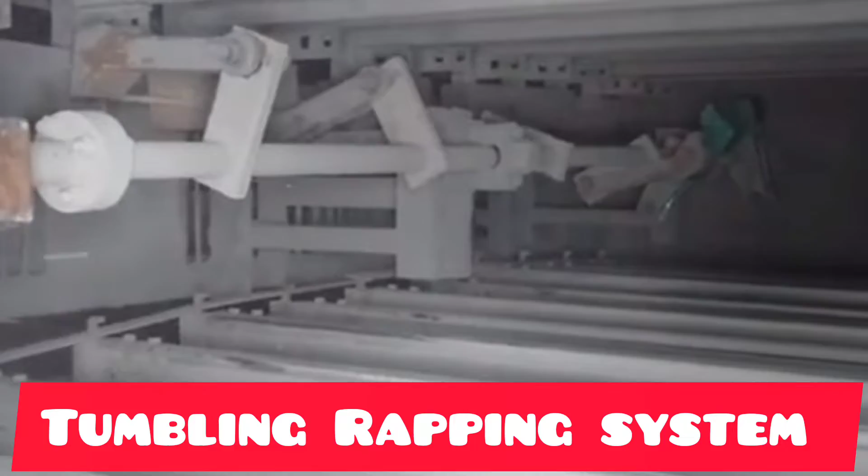Today, we are going to understand the type of rapping mechanism in the electrostatic precipitator, mainly the tumbling rapping system and MIGI rapping system, or magnetic impulse gravity impact rapping system. Before that, let's understand the purpose of the ESP. An electrostatic precipitator is a dust collecting device that removes particles from a gas stream using electrical energy to charge particles. A high voltage system provides power to the discharge electrode to generate an electrical field.

Point 1: Type of rapping system in ESP. Point 2: Purpose of the rapping system in the ESP. Point 3: Application of rapper system in ESP. Point 4: How the tumbling rapping system works. Point 5: Main components of MIGI rapping system. Point 6: How the MIGI rapping system works. Point 7: How to improve the performance of the rapping system. Point 8: Tumbling and MIGI rapping system photos and videos.

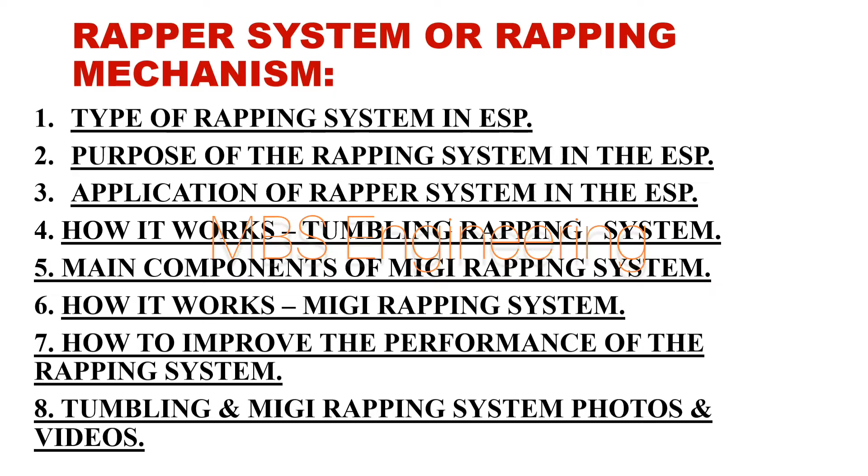Today, we are going to understand the type of rapping mechanism in the electrostatic precipitator, mainly the tumbling rapping system and MIGI rapping system, or magnetic impulse gravity impact rapping system.

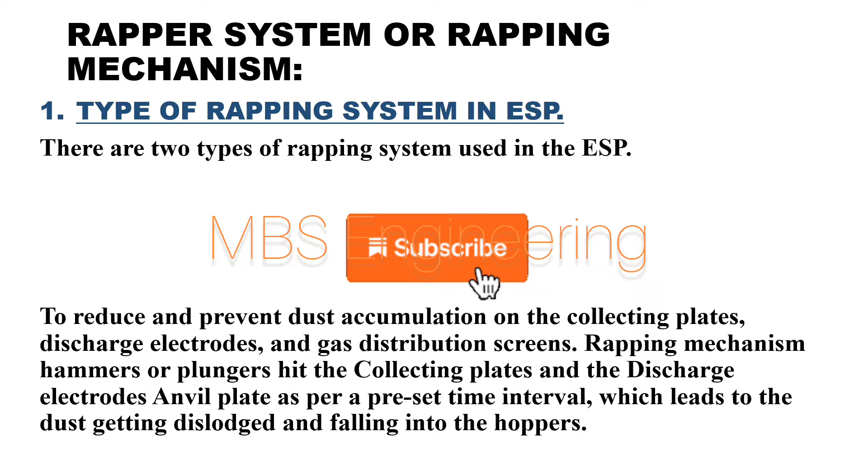Type of rapping system in ESP: there are two types used in the ESP. Point A: Tumbling rapping system. Point B: MIGI rapper system, or magnetic impulse gravity impact rapper system.

Point 2: Purpose of the rapping system in the ESP. To reduce and prevent dust accumulation on the collecting plates, discharge electrodes, and gas distribution screens. The rapping mechanism's hammers or plungers hit the collecting plates and the discharge electrodes' anvil plate at preset time intervals, which dislodges the dust and causes it to fall into the hoppers.

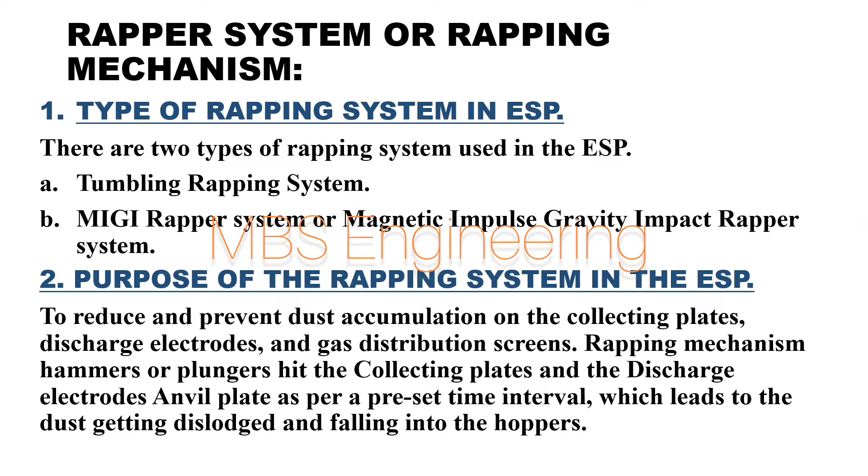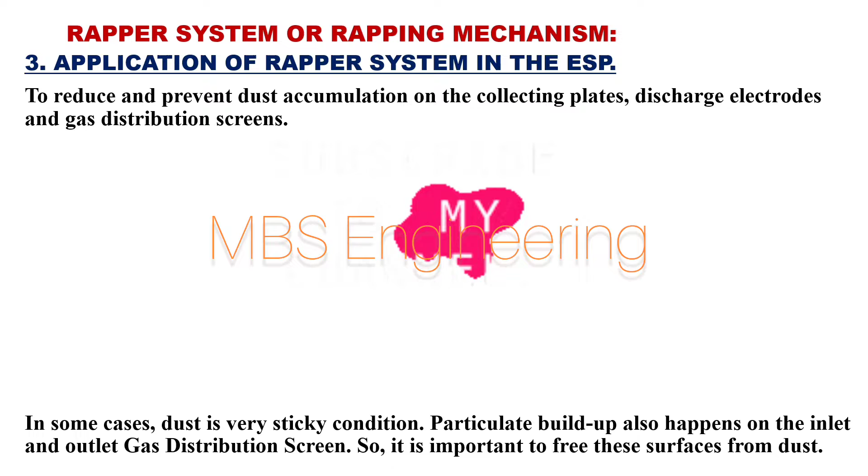Today, we are going to understand the type of rapping mechanism in the electrostatic precipitator, mainly the tumbling rapping system and MIGI rapping system. Point 3: Application of rapper system in the ESP. To reduce and prevent dust accumulation on the collecting plates, discharge electrodes, and gas distribution screens.

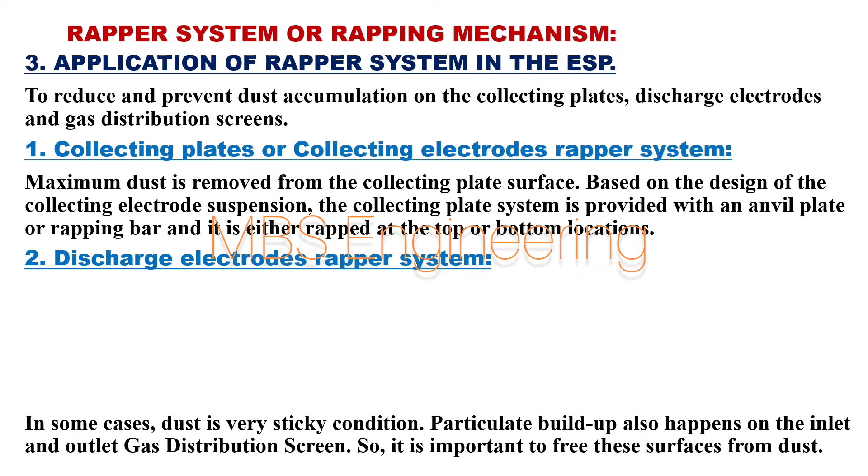Point 1: Collecting plates or collecting electrodes rapper system. Maximum dust is removed from the collecting plate surface. Based on the design of the collecting electrode suspension, the collecting plate system is provided with an anvil plate and a rapping bar, and is rapped either at the top or bottom locations.

Point 2: Discharge electrodes rapper system. The surface of the discharge electrodes is kept free from dust to the extent possible. Based on the design of the discharge electrode suspension, the system is provided with an anvil plate and a rapping bar, and is rapped either at the top or middle locations.

Point 3: Gas distribution screen rapper system. In some cases, dust is in a very sticky condition, and particulate buildup also happens on the inlet and outlet gas distribution screens. So it is important to free these surfaces from dust.

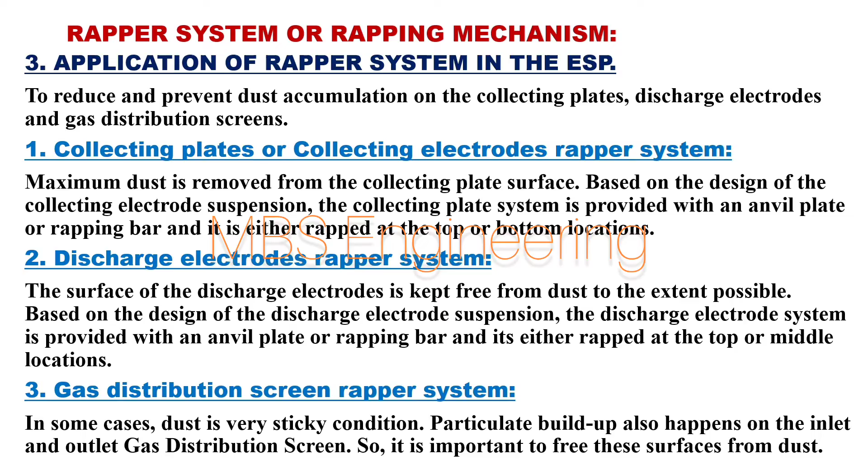Next, we are going to understand the tumbling rapper system, or tumbling rapping mechanism, in the electrostatic precipitator. Point 4: Understanding how the tumbling rapping system works.

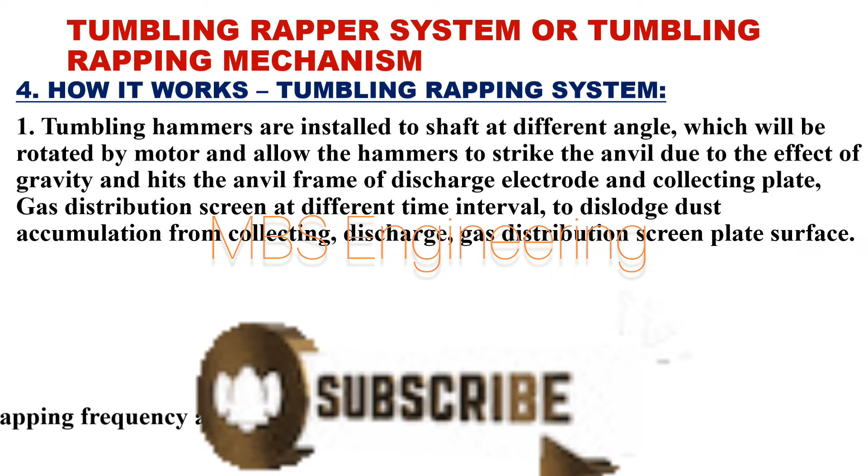Point 1: Tumbling hammers are installed on a shaft at different angles, which is rotated by a motor, allowing the hammers to strike the anvil due to the effect of gravity, hitting the anvil frame of the discharge electrode, collecting plate, and gas distribution screen at different time intervals to dislodge dust accumulation from these surfaces.

Point 2: The weight of the tumbling hammer head and the rapping frequency affect the effectiveness of the rapping impact. Point 3: Rapping intensity is controlled by the weight of the hammers and the length of the hammer mounting arm. The frequency of rapping can be changed by adjusting the speed of the rotating shafts. Rapping intensity and frequency can be adjusted for varying dust concentration of the flue gas.

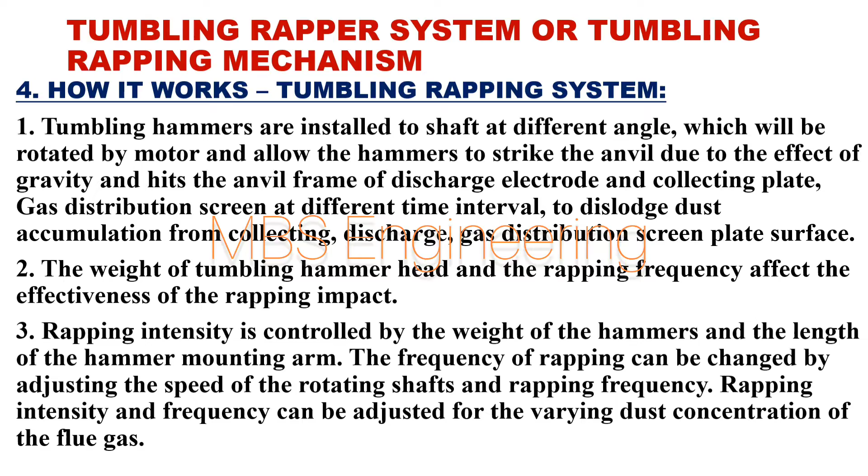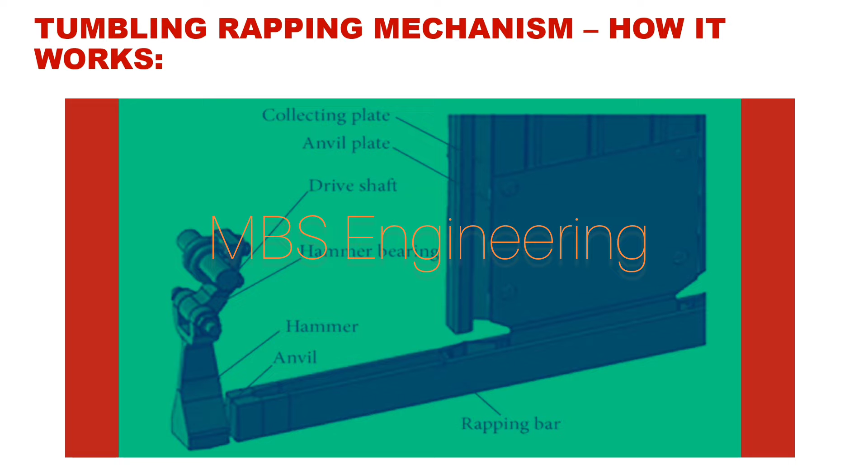Next, we are going to understand how the tumbling rapping system works. Please refer to the tumbling drive mechanism photos and videos for a better understanding.

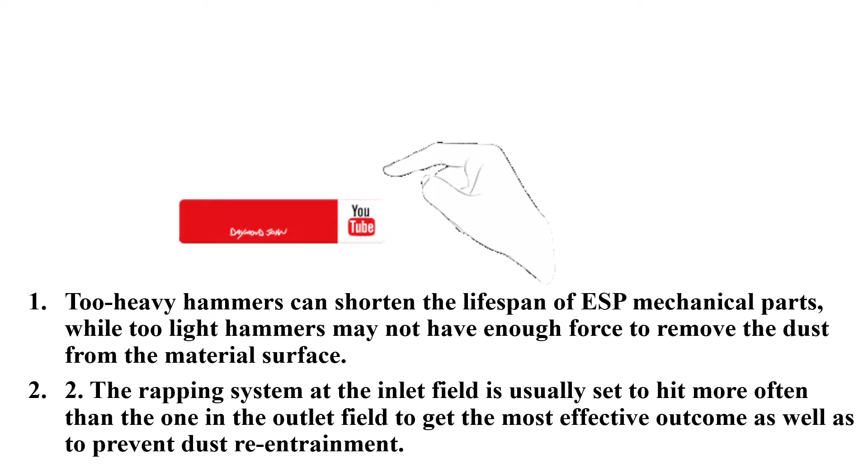Next, we are going to understand the tumbling rapper system, or tumbling rapping mechanism, in the electrostatic precipitator. Point 5: Understanding how to improve the performance of the tumbling rapping system.

The rapper's performance can be optimized by adjusting the time interval between rappings. Normally, a lesser gap between intervals is programmed for the initial fields, for example fields 1 and 2, and a longer gap for the fields towards the outlet, for example fields 3 and 4.

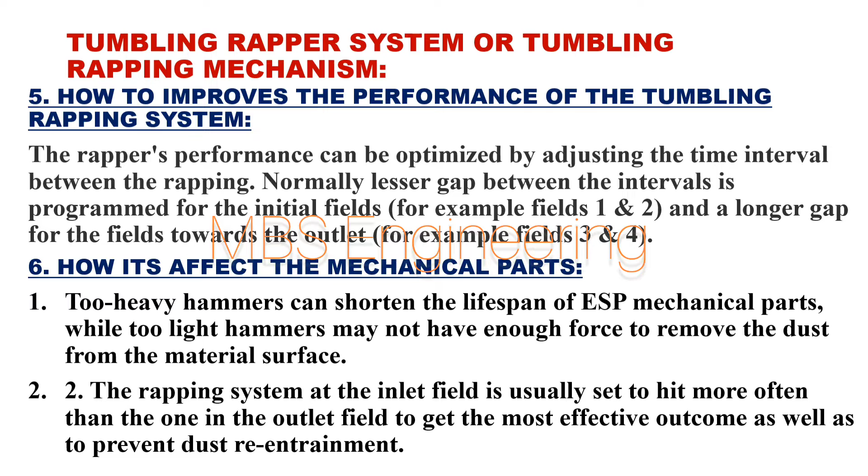Point 6: Understanding how this affects the mechanical parts. First, heavy hammers can shorten the lifespan of ESP mechanical parts, while light hammers may not have enough force to remove dust from the material surface. Second, the rapping system at the inlet field is usually set to hit more often than the one at the outlet field, to get the most effective outcome and to prevent dust re-entrainment.

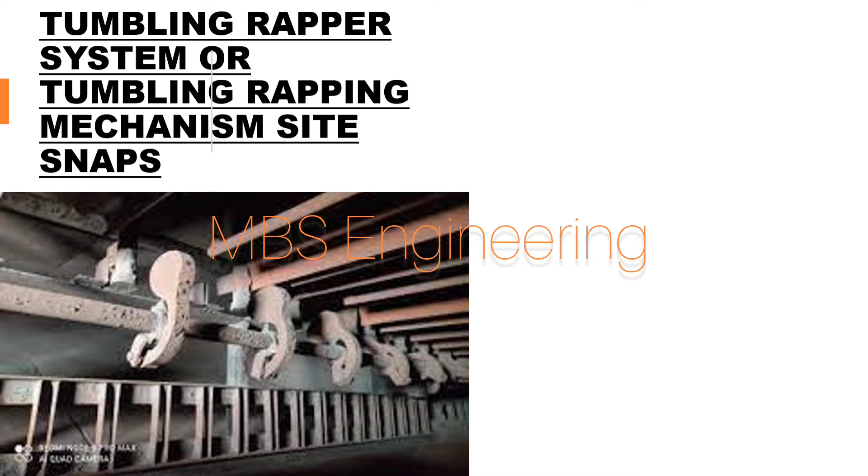Next, we are going to understand how the tumbling rapping system works. Please refer to the tumbling drive mechanism photos for a better understanding.

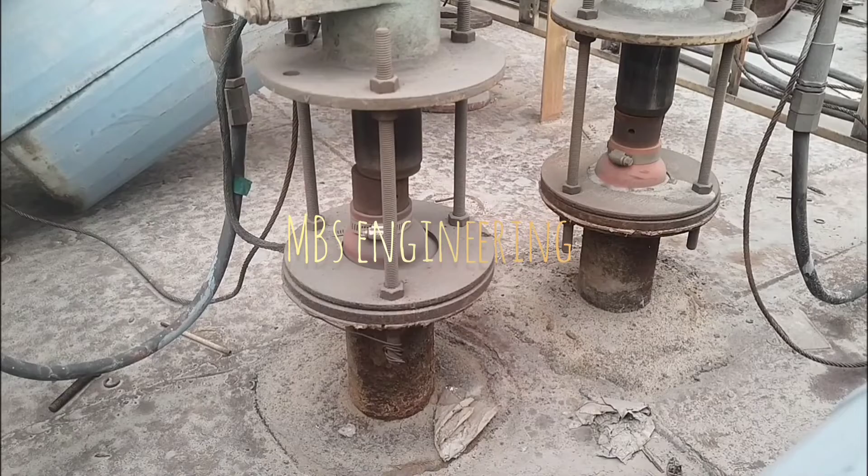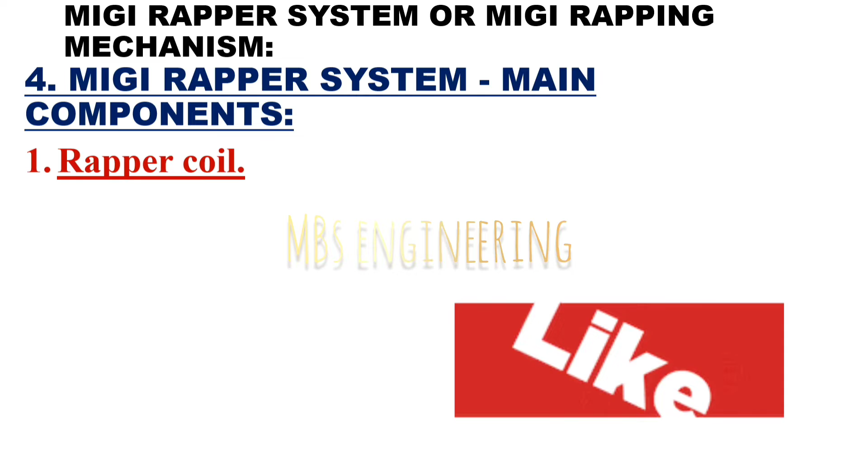Next, we are going to understand the MIGI rapper system, or magnetic impulse gravity impact rapping mechanism, in the electrostatic precipitator. We will discuss in the detailed description given below.

Point number 4: MIGI rapper system. Main components are: first, the rapper coil; second, rapper plunger; third, anvil; fourth, insulator shaft or shaft insulator; fifth, Hypalon boot; sixth, rapper rod; seventh, rapping coupler.

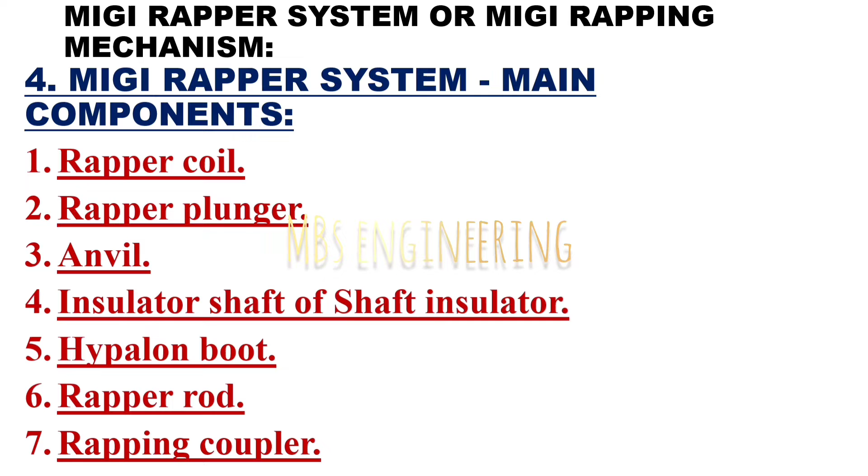Next, we are going to understand the MIGI rapper system or magnetic impulse gravity impact rapping mechanism in the electrostatic precipitator. We will discuss in the detailed description given below.

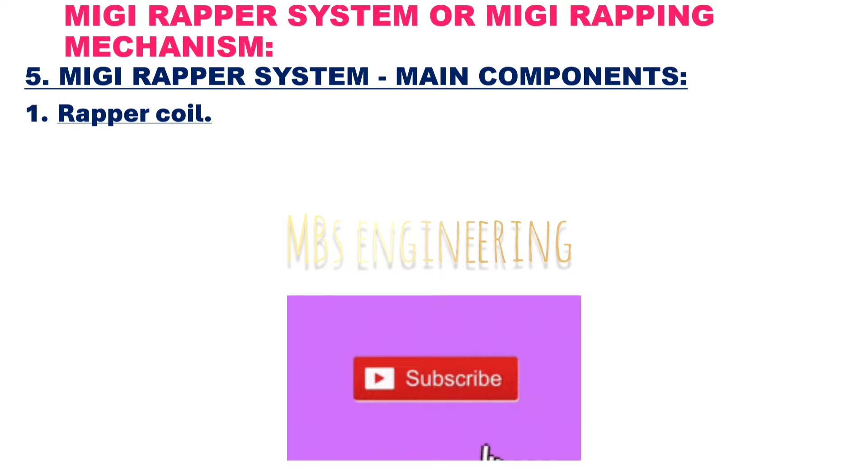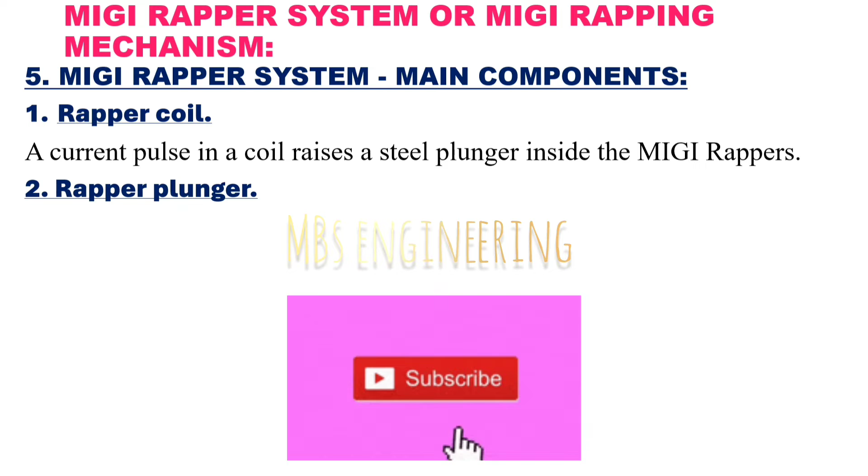Point number 5: Understand the MIGI rapper system main components. Point 1, one of the main components is the rapper coil. Point 2, one of the main components is the rapper plunger. A current pulse in a coil raises a steel plunger inside the MIGI rappers.

Then, by the effect of gravity, the plunger drops back and strikes a rod that is connected to many plates inside the ESP. The frequency and intensity of the rapper are controlled by an electrical controlling system.

Point number 3: one of the main components is the anvil. The rapper plunger drops back and strikes the anvil pad, which is connected with the rapper rod inside the ESP.

Next, we are going to understand the MIGI rapper system or magnetic impulse gravity impact rapping mechanism in the electrostatic precipitator. We will discuss in the detailed description given below.

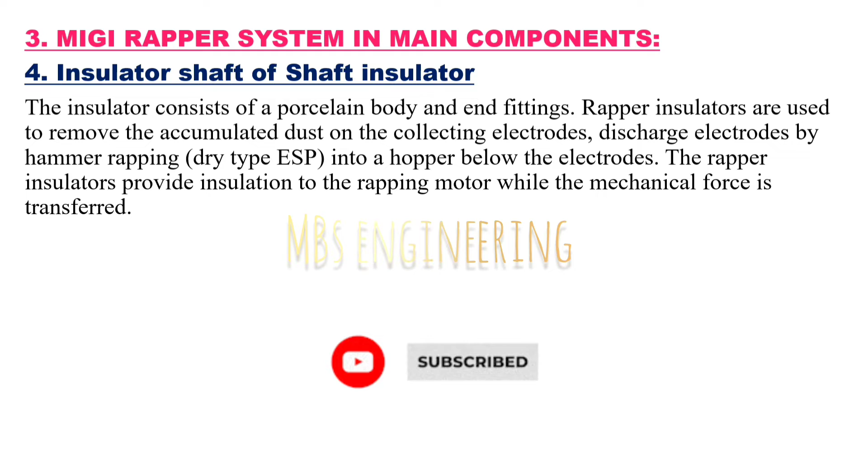Point number 4: one of the main components is the insulator shaft or shaft insulator. The insulator consists of a porcelain body and end fittings. Rapper insulators are used to remove the accumulated dust on the collecting electrodes and discharge electrodes by hammer rapping, in dry type ESP, into a hopper below the electrodes. The rapper insulators provide insulation to the rapping motor while the mechanical force is transferred.

Point number 5: one of the main components is the Hypalon boot with clamp. The Hypalon boot seal is used to prevent air, water, dirt, metal particles and dust from entering the ESP penthouse through the rapping shaft. This helps to avoid corrosion and damage to the shaft insulator.

Point number 6: one of the main components is the rapper coupling and rapper rod. Rapper coupling is used to connect the shaft insulator and rapper rod. The rapper rod is used to transfer the rapping intensity to the parts inside the ESP to remove dust accumulation.

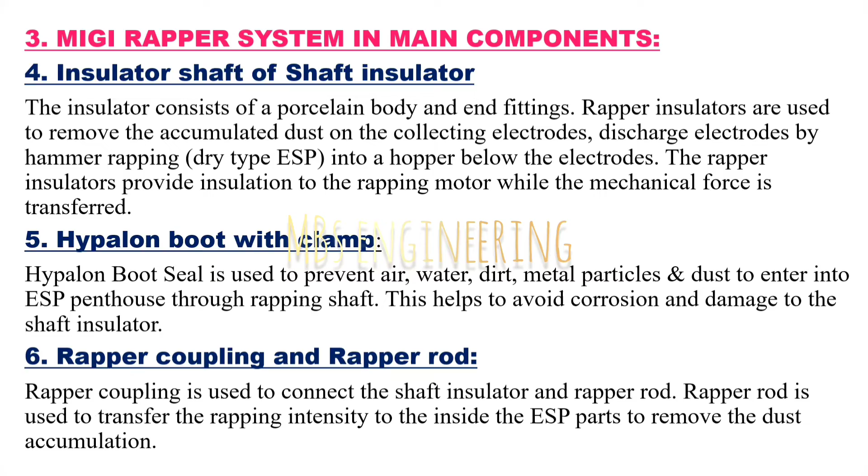Next, we are going to understand the MIGI rapper system or magnetic impulse gravity impact rapping mechanism in the electrostatic precipitator. We will discuss in the detailed description given below.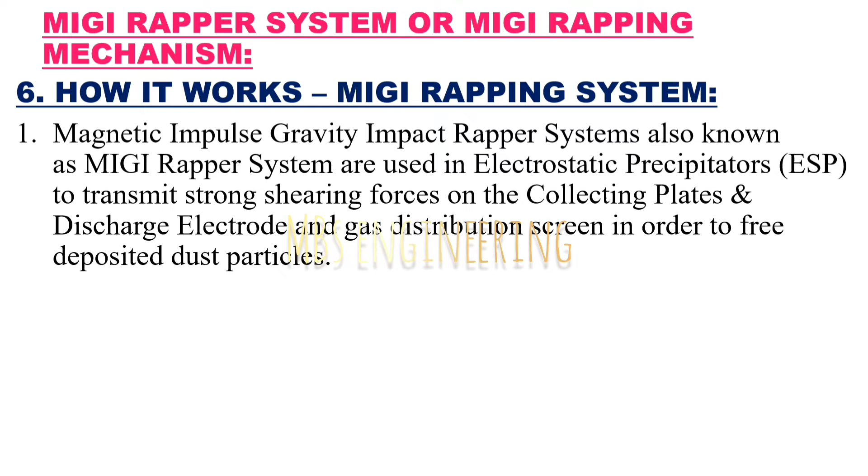Point number 6: understand how it works, the MIGI rapping system or magnetic impulse gravity impact rapper system. Point 1: Magnetic impulse gravity impact rapper systems, also known as MIGI rapper systems, are used in electrostatic precipitators (ESP) to transmit strong shearing forces on the collecting plates, discharge electrode, and gas distribution screen in order to free deposited dust particles.

Point number 2: a current pulse in a coil raises a steel plunger inside the MIGI rappers. Then, by the effect of gravity, the plunger drops back and strikes a rod that is connected to many plates inside the ESP. The frequency and intensity of the rapper are controlled by an electrical controlling system.

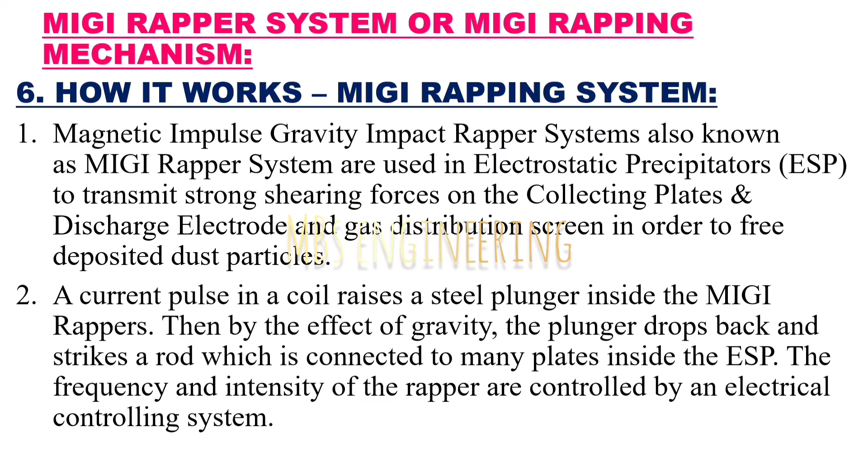Next, we are going to understand the MIGI rapper system or magnetic impulse gravity impact rapping mechanism in the electrostatic precipitator. We will discuss in the detailed description given below.

Point number 7: understand how to improve the performance of the MIGI rapping system. The rapper's performance can be optimized by adjusting the time interval between the rappings. Normally, a lesser gap between the intervals is programmed for the initial fields, for example fields 1 and 2, and a longer gap for the fields towards the outlet, for example fields 3 and 4.

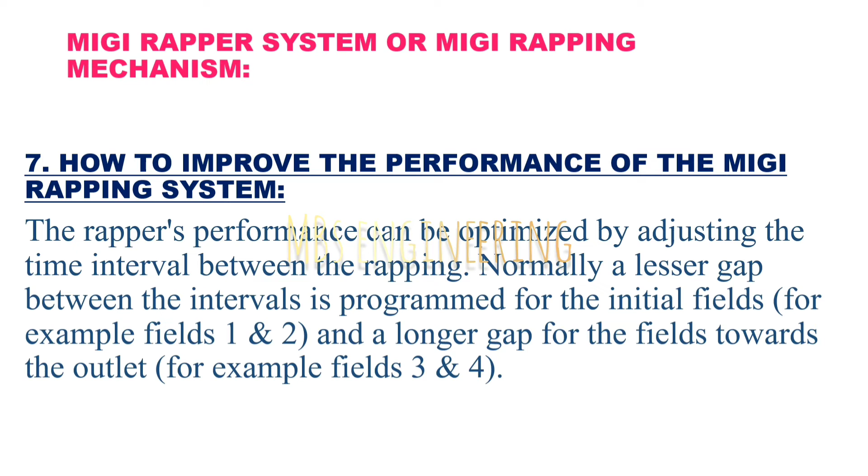Next, we are going to understand the MIGI rapper system or magnetic impulse gravity impact rapping mechanism in the electrostatic precipitator. We will discuss in the detailed description given below.

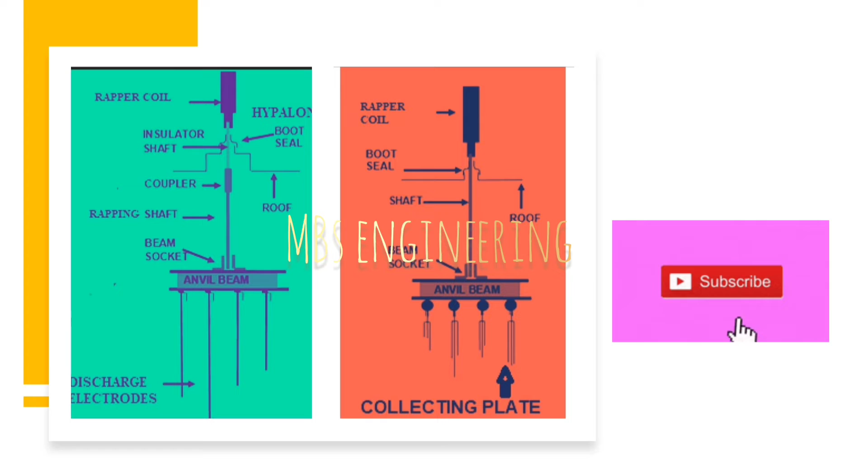Next, please refer to the schematic layout for a better understanding of both collecting electrodes and discharge electrodes. The shaft insulator is provided in the discharge rapping system. In the discharge rapping system, the rapper insulators provide insulation to the rapping motor while the mechanical force is transferred.

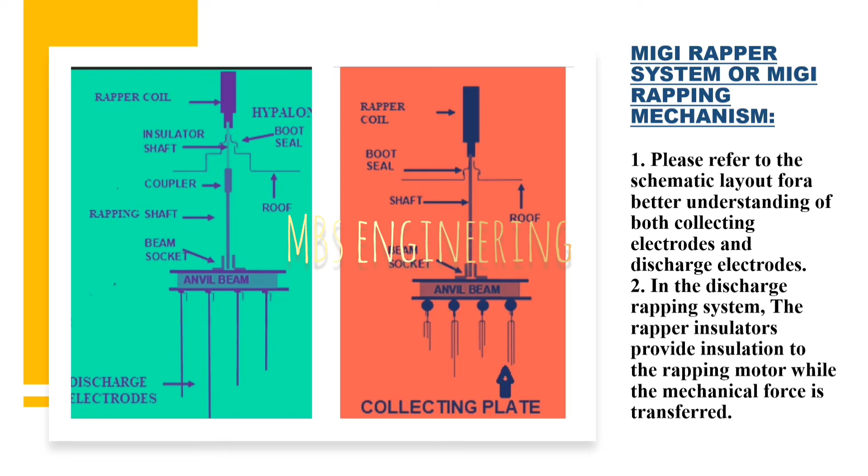Next, we are going to understand the MIGI rapper system or magnetic impulse gravity impact rapping mechanism in the electrostatic precipitator. Please refer to the snaps for the MIGI rapping system for better understanding.

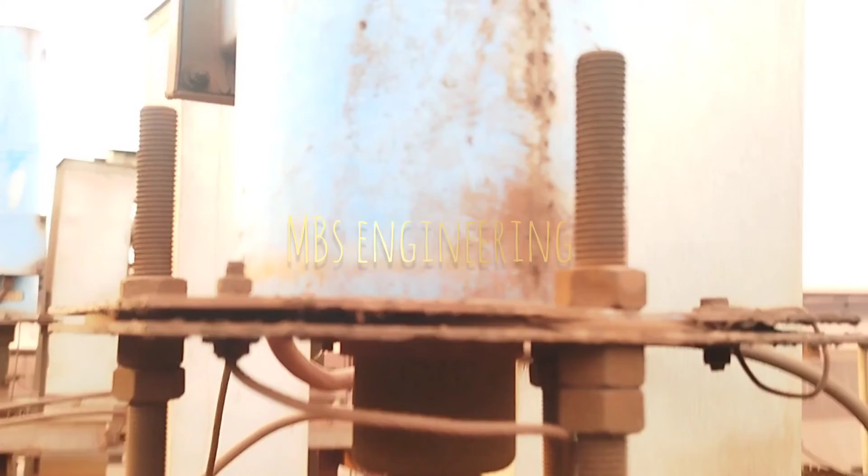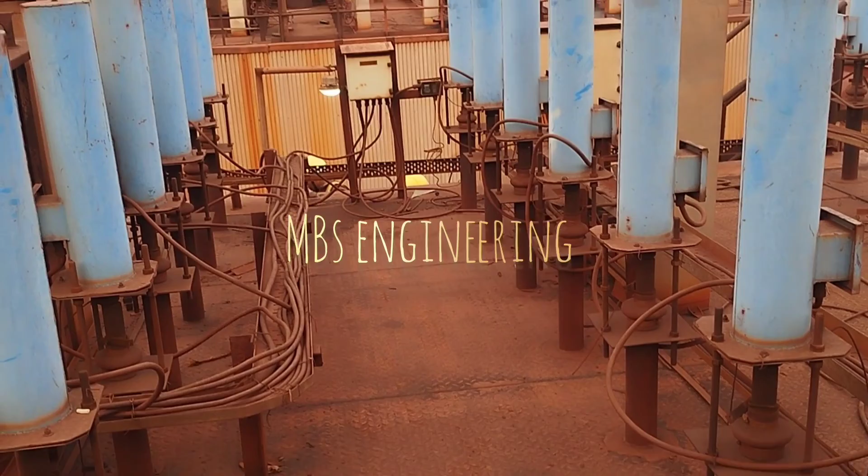I hope everyone understands the type of rapping system and its purpose in the ESP and how it works, both the tumbling rapping system and the MIGI rapping system, along with its working videos and photos for better understanding.